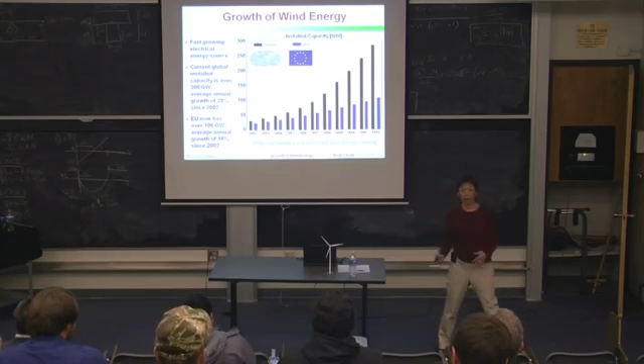Now, if we look at just the European Union, which is where I'm giving the talks, I'm trying to draw some data from Europe. It's had a slower growth, but still very healthy, about 16% annual growth in installed capacity since 2002, and they're now at above 106 gigawatts of installed capacity. So in 2002, they had about 75% of the world installed capacity. Now they have about 35%. So the growth in installed wind power has been more elsewhere in the world.

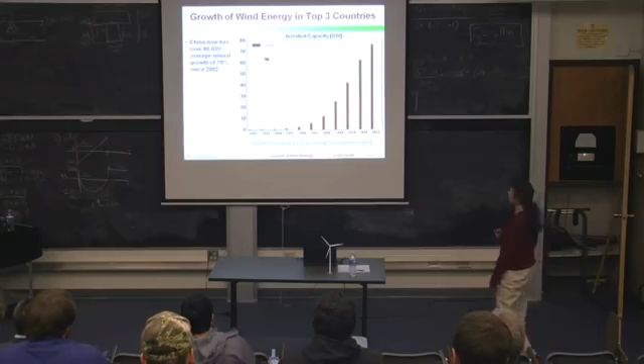Now let's take a look at the top 3 countries in installed capacity. So who knows which country has the most installed capacity? China, yes. So China in 2002 only had about half a gigawatt of installed capacity. They've had an annual growth rate of 70% on average since 2002, and now in 2013 they've exceeded 80 gigawatts of installed capacity. Now, which country do you think?

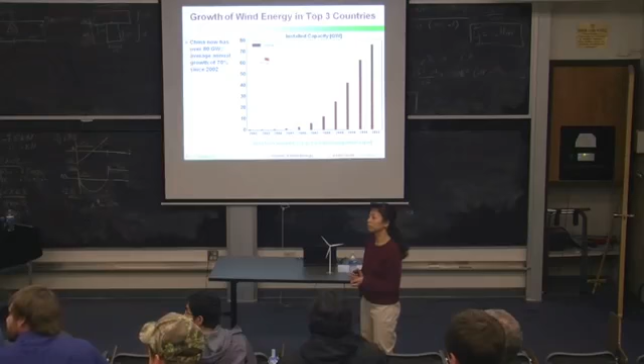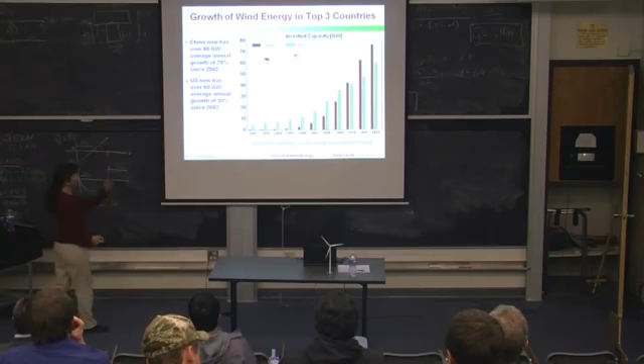Okay, so which country is second in terms of installed capacity? US, exactly. So US now has over 60 gigawatts of installed wind capacity. We've had an annual growth rate of 30% every year since 2002. So in 2002, we had maybe 10 times the installed capacity of China. We've grown at a slower rate, so China surpassed us in 2010.

Now, which country is number 3, do you think? Australia? No. Germany, yes. So Germany has grown still at a reasonably healthy rate, 10% annually since 2002 on average. They now have over 30 gigawatts of installed capacity. They had about 25 times the installed capacity of China in 2002, about 2.5 times what the US had. They've grown at a slower rate since then.

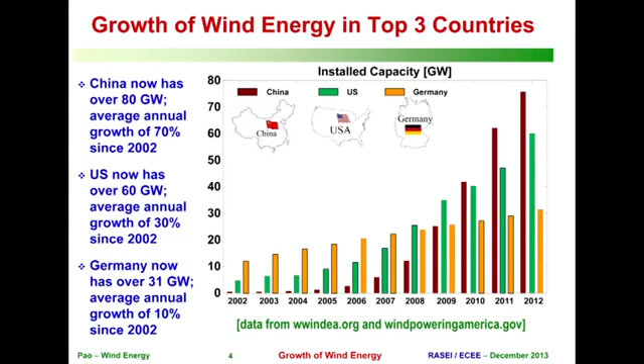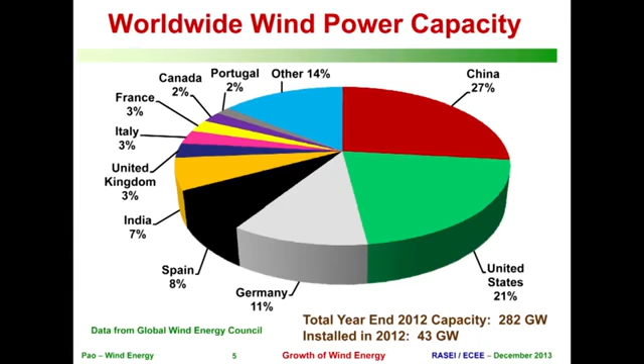So several European countries are like that. They had more installed capacity about a decade ago compared to other countries, and they've grown still at a healthy rate, but not as fast as some of these other countries. So before I get to another way to compare, I have one more slide showing more countries. After China, US, and Germany, we have Spain. India, like China, has seen rapid growth in recent years. A number of other countries in Europe; Italy, where I'll be next week, is about 7th in the world. Canada has had a number of strong years in installations recently as well.

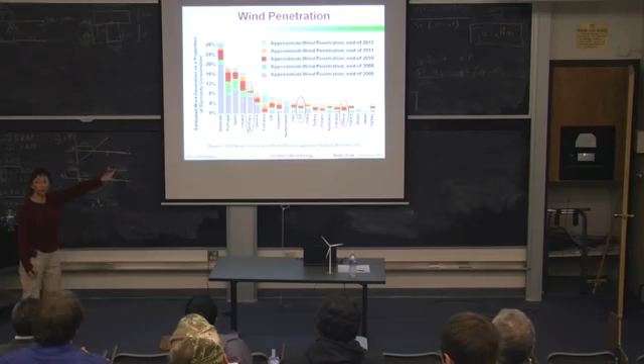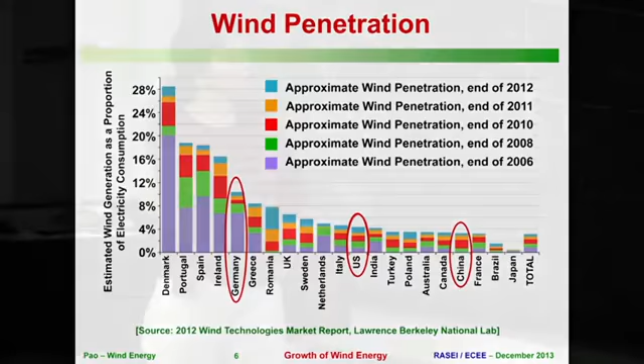So now getting to wind penetration, that's another way to compare countries. Wind penetration is the percent of each country's electrical energy needs that is being met by wind. And in this regard, Denmark is by far the number one country. About 30% now of Denmark's electrical energy needs are being met by wind. So here I circled the 3 countries that we talked about earlier. China, even though it has the most installed capacity, actually has lower wind penetration. A number of European countries have quite strong wind penetration. US is at just over 4% right now.

Okay, so the wind industry overall is relatively healthy. There has been strong growth in installations worldwide, but the wind industry is continuing to try to drive down the cost of wind energy to try to make it more and more competitive with other sources of energy.

Okay, and one way that it tries to do this is to go to larger and larger wind turbine sizes. So if we look at the wind turbine sizes over the last 3 decades, they've really grown. So wind turbines that are typically installed on commercial wind farms now are in the megawatt range. They typically are at about 90 to 100 meters at hub height, and they typically have rotor diameters of about 100 meters. That's hard to fathom.

When you see a wind farm far away, they don't look that large until you get very close up. So I've put 2 other things on here at approximately the right size. So a Boeing 747 is noticeably smaller than the current rotor area. Yeah, so that's a soccer field, since I'm going to be in Europe next week. And so these are really large machines.

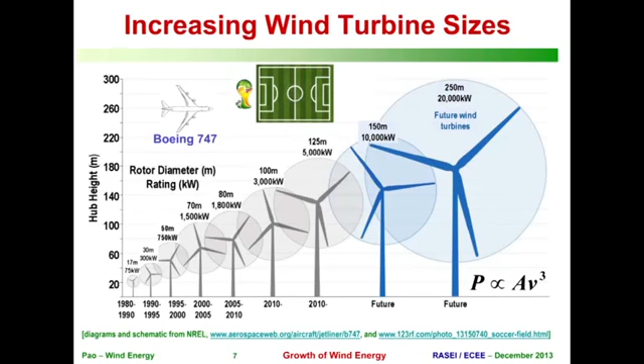So for land-based turbines, the commercial wind farms that are being installed now tend to have 1 to 5 megawatt wind turbines. These larger turbines that are under development are more for offshore wind, because for land-based turbines, in terms of the size of roads and the size of railways, they've really reached capacity in terms of the sizes of wind turbines that they can install. So these larger turbines are being developed primarily for offshore wind.

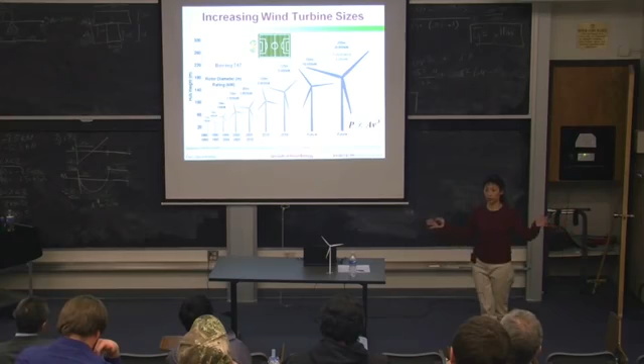Now you might say, well, why are they developing larger wind turbines if they're so hard to transport? Well, the primary reason is that the power available in the wind is proportional to the cube of wind speed, and wind speed tends to increase as you get higher off the ground, so that's one reason to go to higher and higher towers. And the power is also proportional to the rotor area, so that's another reason to go to larger turbines.

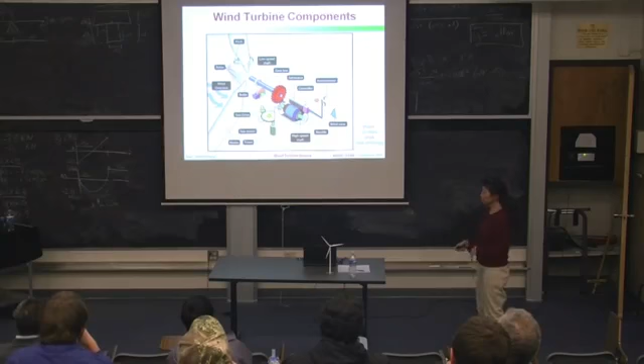All right, so let me just briefly, in a nutshell, explain wind energy. So wind comes into the rotor plane, and because of the design of the blades, that creates lift, causing the rotor to spin. That causes the low-speed shaft to spin, and that typically is stepped up through a gearbox to a high-speed shaft, which will spin the generator, generating electricity. So I have kind of a model turbine, which I'll pass around just for fun.

So the main components are the base, that's usually a lot of concrete, the tower, and then the nacelle, which sits at the top of the tower and holds the generator, and then the rotor, which includes the 3 blades and the hub at the center. And so this is maybe a 1/200th scale turbine compared to a megawatt wind turbine. I have other ones, yeah.

So, can you talk at all about these turbines without gearboxes? Yeah, so I'm not going to talk about direct drive, but Sandy Butterfield gave a very good RASEI talk, which I think was recorded, so it should be online, about direct drive. No, I'm not going to talk about that.

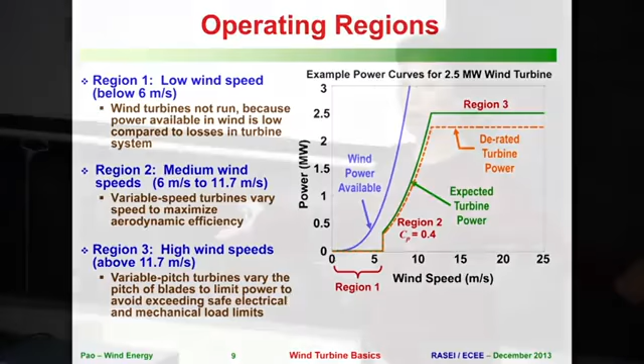Now, as wind speeds continue to increase, we will move into what's known as region 3, or above rated operation. So now once there's enough wind speed, now we're actually capturing already 2.5 megawatts of power. We're generating 2.5 megawatts of power. And we don't want to generate any more power because we'll burn out the generator. And so in region 3, what's done is to pitch the blades to let more of that wind go by. So we're shedding some of that wind so that we can maintain the power capture at the rated power of the turbine.

And we also try to pitch the blades to additionally try to mitigate structural loads on the turbine, okay, to reduce maintenance issues and extend the lifetime of the turbine, all to try to reduce the cost of wind energy. Now, so this is typically how wind turbines are operated. So in region 2, you try to maximize power capture. And in region 3, you're regulating the power at that rated power of the turbine.

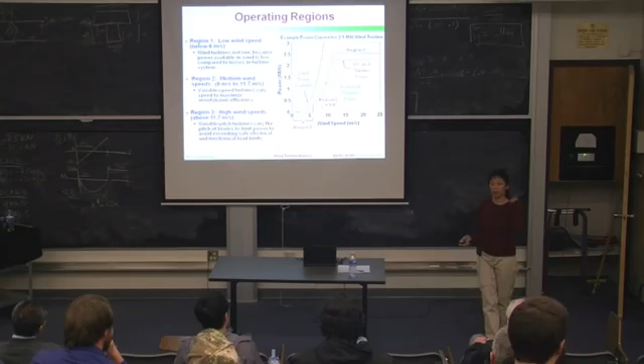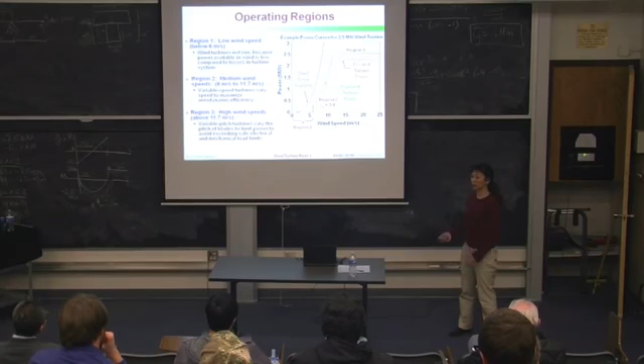So effectively, in both these operating regions, region 2 and region 3, you're operating at the maximum power that you can be. So here, you're trying to maximize power, and here, you're at the maximum power, rated power of the turbine. And so the concern with having more and more wind power on the utility grid is that wind turbines typically can't increase their power to help address electrical load issues that might occur on the grid. And so what I'll talk about later on in the talk is, can we or should we derate the power being captured by the wind turbines so that then there's headroom that allows wind turbines then to respond to utility requests for more power to try to balance the grid.

Right? So before I talk more about what's called active power control of wind turbines, let me talk about the operation of the utility grid. I'll first talk about it more generally, and then talk about some of the challenges as we increase renewables, in particular solar and wind, on the grid. And then I'll talk about some of the solutions that can try to address some of the issues.

Okay, so just a very brief history of power systems. As power systems were built up, as there are customers, typically there's power that's generated at a power plant, and it's transmitted, often over long distances, to a local power substation, which then distributes the power to the customers. Okay? Now, most traditional power plants have what are called synchronous generators.

Okay? And as power systems were built up in different geographical regions, ultimately they were connected for improving the reliability, so that if one region had greater electrical demand, the power systems from other regions could help provide that generating capability. Now, when synchronous generators are operating at nearly the same frequency and they get interconnected, they tend to synchronize with one another. They tend to swing together at essentially the same frequency. Large deviations in the frequency can destabilize the network of these connected generators. And so we typically don't want large deviations in frequency.

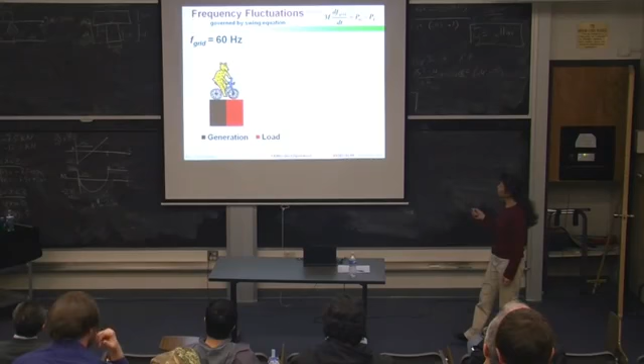So I want to thank Jacob Aho, my PhD student, for this slide. We've used it a number of times to try to explain this concept in a fun way. So the grid frequency fluctuations are governed by the swing equation. PG is the power being generated. PL is the electrical load. So we want the power generated to equal the electrical load.

Okay, so when it is equal, Mr. Conventional Bear is happily pedaling on a flat surface, and the right side here is 0, and so the frequency of the grid is constant at the desired frequency, which in the US is 60 hertz, in Europe is 50 hertz. M here is the inertia of the system, or it's proportional to the inertia of the system. So we'll talk about that in a bit. Now, if electrical load suddenly increases relative to the power generated, then this right side becomes negative and the frequency drops. Mr. Conventional Bear has a harder time going uphill here, slows down.

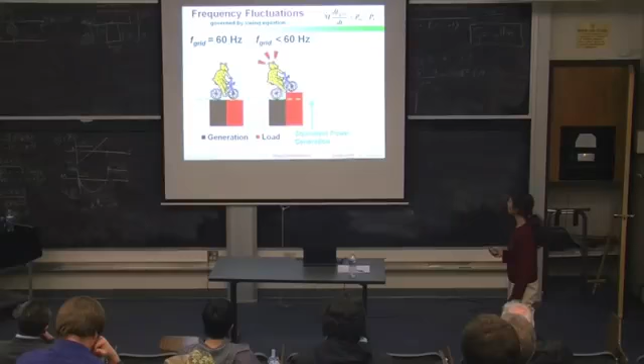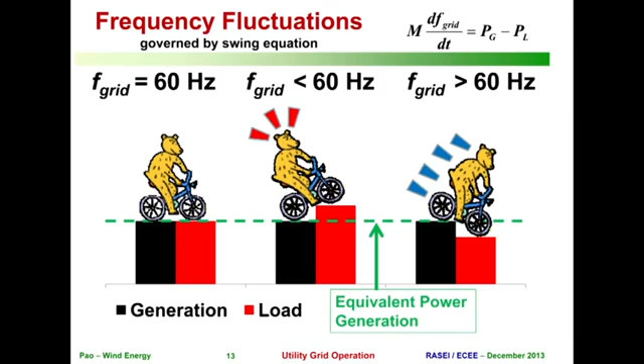Now, if the electrical load drops relative to generation, then this right side is positive and the frequency of the grid will increase above 60 hertz. Now, it's probably more common that electrical load increases, or sometimes a generating source will have a fault and drop off the grid. And so oftentimes we want to respond to events such as that.

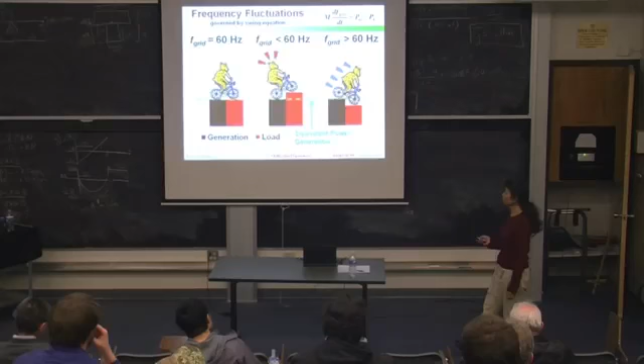So if we have a loss of generation event, PG drops and the grid frequency will suddenly drop. Now, how fast this frequency drops depends on this system inertia. The larger the system inertia, you can think of dividing this equation by m, so this comes to the right-hand side. So the larger the system inertia, the smaller the magnitude of this slope in this drop of frequency.

Now, primary frequency response is this first period where the synchronous generators, via their governors, provide an automatic response to try to arrest the frequency drop and then bring it back up to some steady state. And this all occurs in about 30 seconds.

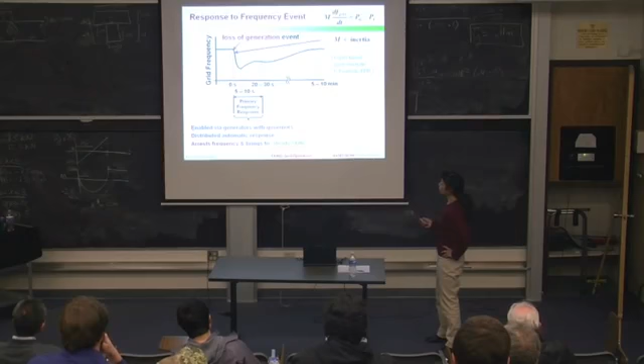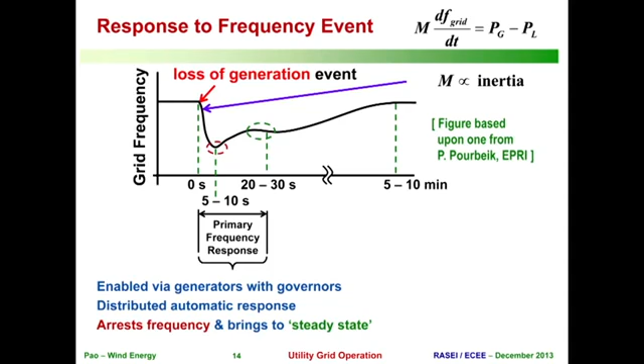Now, once we complete the primary frequency response, then it's transitioned to what's known as a secondary or tertiary frequency regulation period, where there might be automatic power commands generated through an automatic generation control, or manual power commands generated. And the goal here is to bring this frequency back up to the 60 hertz in the US or 50 hertz in Europe.

All right, so let me talk a little bit about primary frequency control and secondary regulation. So in the industry, this is typically referred to as primary frequency response, but in electrical engineering, we talk about frequency responsive systems, and so it can get pretty confusing. And so I like to refer to this as what we're really doing is primary frequency control. So that's how I'm going to refer to that for the rest of the talk. I might also call it droop control.

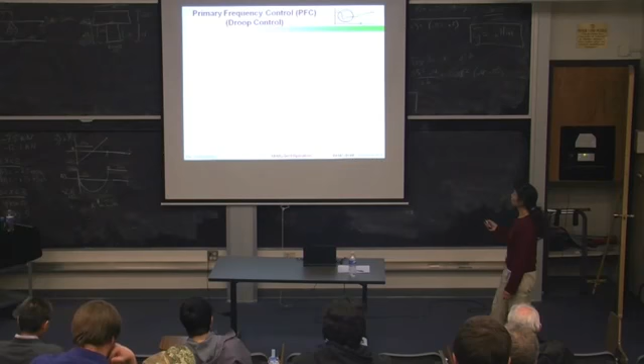So we're essentially trying to arrest the frequency drop and bring it back to some steady state here. And this is for synchronous generators provided via governors. And the governor response is characterized by what is called a droop curve. That droop curve is typically fixed for the mechanical synchronous generator machine. So what a typical droop curve looks like is as follows. This is a plot of the percent change in commanded power as a function of grid frequency.

And so if the grid frequency is close enough to 60 hertz within this deadband, then everything is happy. Nothing actually is activated in this primary frequency control. But if the frequency deviation gets large enough, we move out of the deadband. So in the US, it's common to see deadbands of plus or minus 15 millihertz or plus or minus 30 millihertz, kind of in that range.

And so if, say, we have a sudden loss in generation, grid frequency will drop, and if it drops enough, then we come to this droop region where it's going to command an increase in power from this generator to try to arrest that frequency drop. So essentially it's a proportional control in this region.

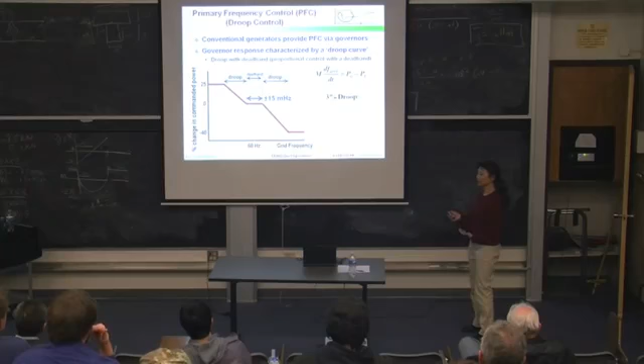So because this is being plotted as percent change in commanded power as a function of grid frequency, the smaller the percent droop, the more aggressive the droop curve. So a 3% droop means that a 3% change in grid frequency leads to a 100% change in commanded power. So if you have a 1% droop, then a 1% change in grid frequency will lead to a 100% change in commanded power. So it's more aggressive.

All right. Now, secondary control is a little more complicated to explain. There are many different ways and different details in different utility systems, so I'm not going to go in as much detail here. But the goal here is that after the primary frequency response, we want to bring the grid frequency back up to 60 hertz, say, in the US.

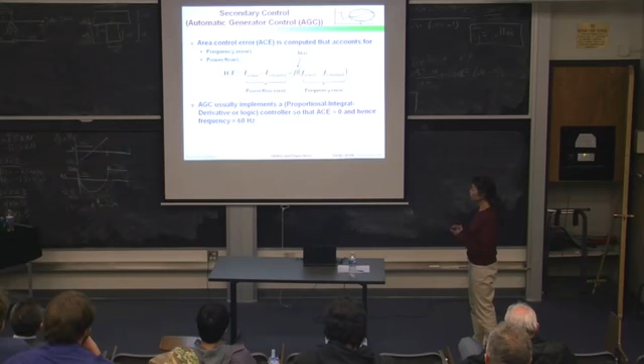And what's typically done is, based on measurements, an area control error is computed, and it's a function of frequency errors as well as power flows. And so this ACE signal is a function of this frequency error. Beta is a gain that's often referred to as a frequency bias. And this is the actual interchange power flow, and this is the scheduled interchange power flow. And so if there's an error there, that's accounted for in this area control error.

And so the automatic generator control generally implements a pretty simple control algorithm, often a proportional integral derivative controller or a logic controller, to drive this ACE signal, the area control error signal, to 0. And so that will essentially drive the frequency to the desired frequency of 60 hertz.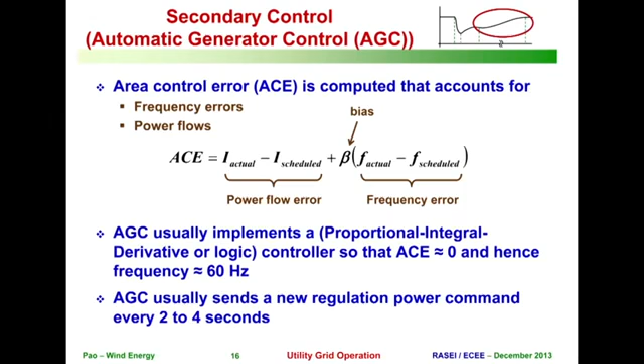Usually, the automatic generator control sends a new regulation power command every 2 to 4 seconds. So to recap, we want electrical generation to be equal to electrical load. Traditionally, electrical generation is controlled to follow the varying load. The utility typically doesn't know when you're going to use your appliances or lighting, or when a factory is going into full production. It's just trying to adjust generation to meet varying demand.

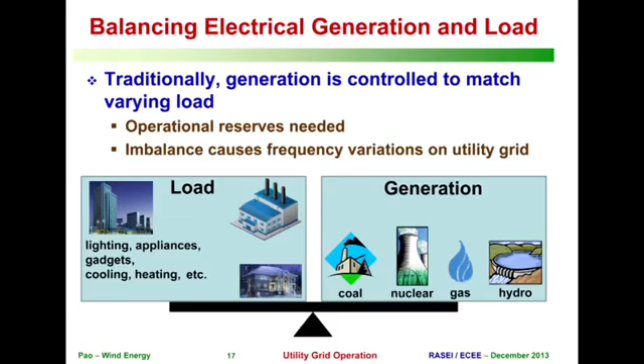In order to do that, it has to have some operational reserves. It can't always be operating at maximum output. And if there's an imbalance between electrical generation and load, that will lead to frequency variations on the utility grid. If there are large imbalances, that leads to large frequency fluctuations, which can cause unwanted under-frequency load shedding, or even blackouts.

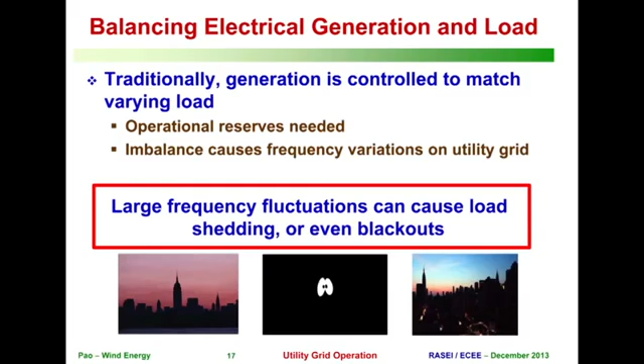A utility might have some amount of nuclear, which they operate, and some amount of coal. Ideally, they'd like nuclear and coal to operate at a fixed rate of energy production. There might be some hydro, and oftentimes gas is the most flexible, so that's the one that gets cycled up and down to meet increases and decreases in demand.

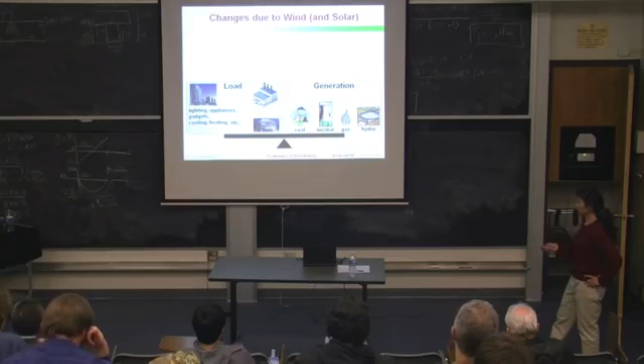Now, what happens when we have increasing amounts of wind and solar in the generation mix? Wind and solar are intermittent generating sources. Wind energy is only available when the wind blows, and solar energy is only available when the sun shines. People are worried that as more wind and solar are integrated onto the utility grid, these intermittent sources are hard to predict and hard to control. It's going to be harder and harder to control this generation mix to meet variable load.

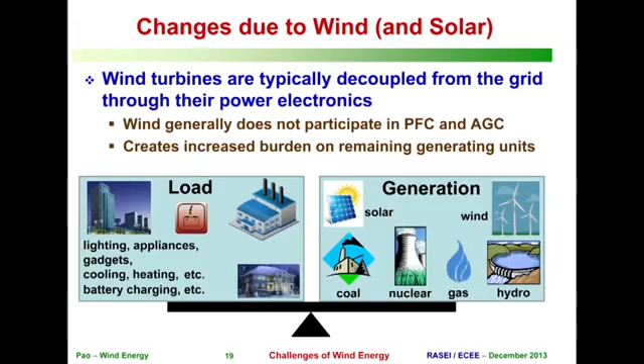Wind turbines, and similarly solar, are typically decoupled from the utility grid through their power electronics, so they're usually not asked to provide primary frequency control or secondary automatic generator control. As more wind and solar are added to the generation mix, the remaining traditional sources are asked to do more and more of the balancing work. So the remaining sources become a smaller percentage of the generation mix, yet they're still asked to do all that balancing.

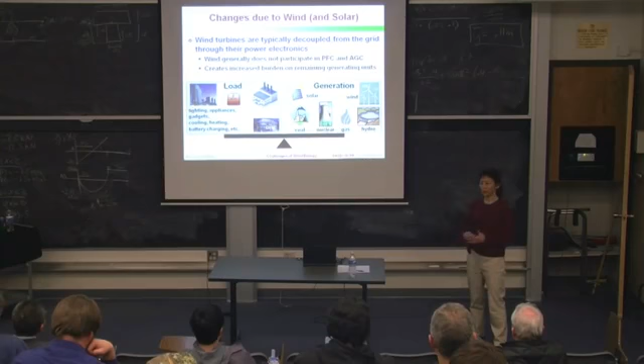There's worry that it's just going to be too hard to balance generation with load. In particular, if we look at more electric vehicles on the grid and peak demands that might come about—say 1 million electric vehicles—at the end of the day, after people have commuted to work and back, they all plug in their electric vehicles. There might be a sharp increase in load that's difficult to meet, raising concerns over the reliability of the utility grid from many different viewpoints.

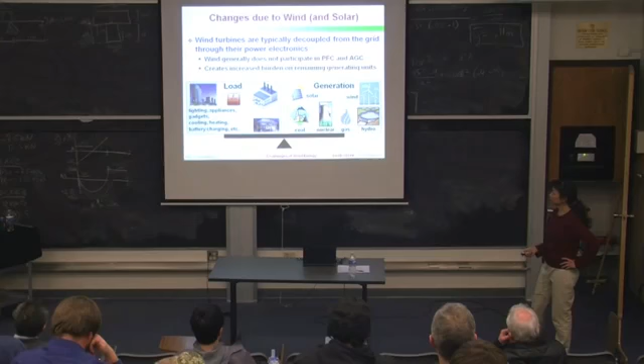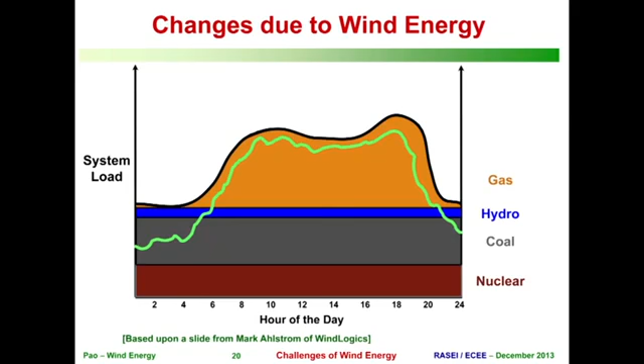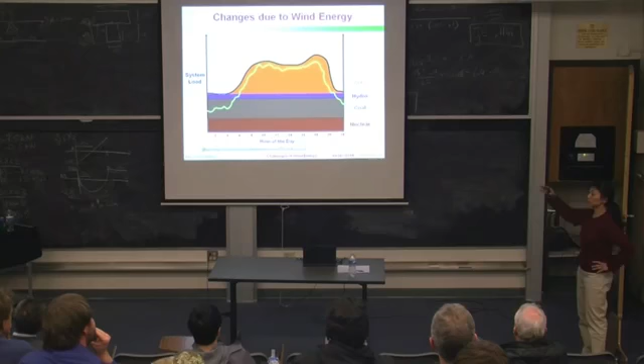Wind typically blows harder at night in most regions around the world, so there's a bigger decrease at night and maybe a bigger decrease in the evening, and less so during the daytime. Because of this decrease, we're now asking hydro to cycle, and also coal to cycle, and if we increase wind penetration further, we might ultimately need nuclear to cycle. This is some of the concern—it's difficult for coal to cycle rapidly to respond to changes in system load.

All right, so what are some methods that we can try to address these issues?

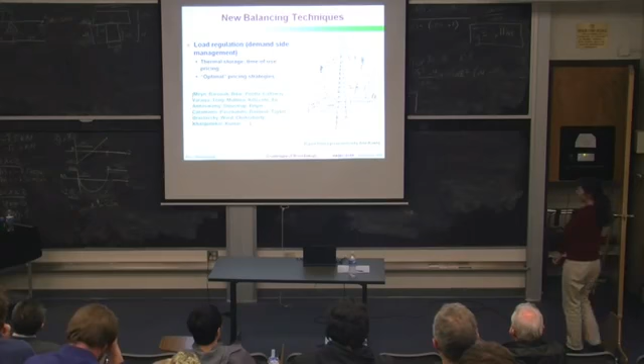One method is to try to do load regulation, or what's also called demand response or demand side management. Essentially, you predict what might happen during the day. If it's predicted to be a really hot day in the summertime, while it's still early in the morning and demand is low, you might start to cool down buildings more than you would at that time of day, using the thermal inertia of the building. Most people can't feel the difference of a few degrees, so air conditioning might not be required during the peak part of the day, which helps reduce peak demand and improve grid reliability. A number of people in our field have looked at demand side management, time of use pricing, and optimal pricing strategies so that users do the right thing and avoid increasing electrical load at extreme peak times.

Another way to address the issues of increasing renewables in the grid is to develop effective energy storage techniques. Unfortunately, at the current time, the most effective electrical energy storage methods are really expensive, so it's not being embraced as the solution just yet. People in our field have looked at better modeling and control of storage options, and also at where to place storage at different locations on the utility grid to maximize effectiveness.

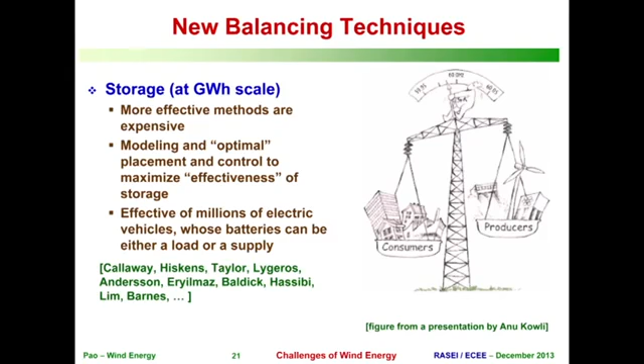They've also looked at the case of having a million electric vehicles. While they can be viewed as a load, they all have batteries, so they can also be viewed as a supply. If we had smart meters and distributed controllers on these electric vehicles as they get plugged in at the end of the day, as long as the user doesn't care about their vehicle being charged until the next morning, we could let the utility decide how to charge that vehicle, possibly drawing energy from the vehicle when the user doesn't necessarily need that energy.

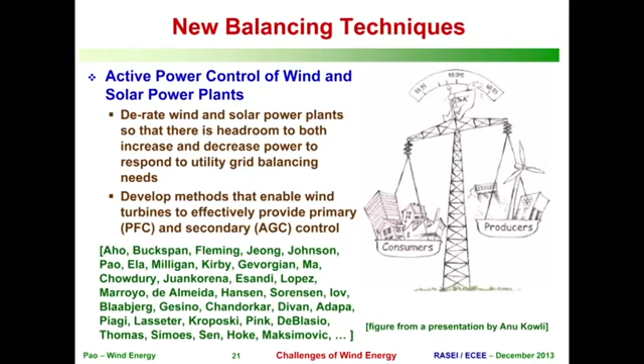Finally, I'd like to spend the next bit talking about active power control of wind power plants in particular, though you could do the same for solar. The idea, as I alluded to earlier, is that instead of operating wind turbines and solar at their maximum power capabilities, we derate them, say to 90% or some level, so we leave ourselves headroom to increase or decrease power in response to utility grid requests to help balance needs. More work has been done developing active power control methods for wind turbines. It's a relatively newer area of research in the solar community, but Professor Maksimovic and Andy Hoke are actively looking at active power control of solar as well.

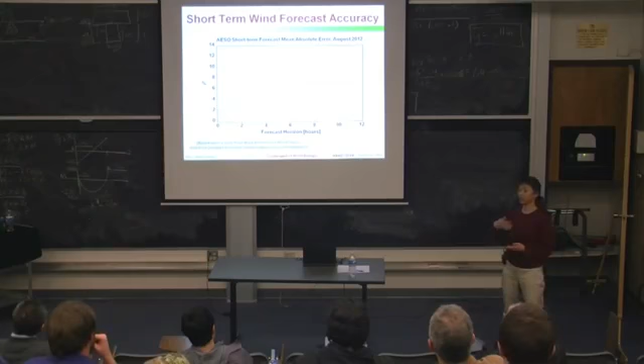Before I talk more about active power control of wind, I want to note that wind forecasting has been improving. This is largely being done by the atmospheric science community, which has been developing better methods of wind forecasting. As utility grids change the way they operate to be more flexible in planning, say five minutes ahead in shorter time increments, this along with better forecasting will mean very accurate forecasts and better reliability in terms of scheduling wind that will actually be available and provided.

Let me now talk a little more about active power control of wind turbines. Can we actively control the power of wind turbines, not always at the maximal level but at some lower level, and then control that power to follow a desired power reference so we can help stabilize the grid and make it more reliable? Wind turbines, as I mentioned, are traditionally decoupled from the utility grid, so they're typically not asked to provide primary frequency control or secondary regulation.

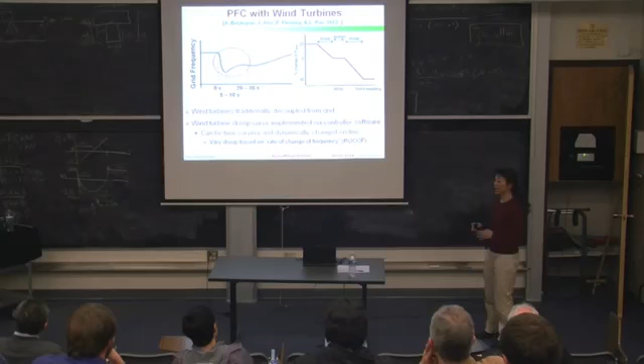But for wind turbines, we can implement a droop curve synthetically via software and ask a wind turbine essentially to respond to frequency deviations.

For wind turbines, we have more flexibility. Synchronous generators typically have a fixed droop curve tied to their physical characteristics, but for wind turbines we can design different types of droop curves. In fact, we found that dynamic droop curves, time-varying curves that change their characteristics over time, particularly as a function of the rate of change of frequency on the grid, tend to be very effective.

As an example, if the rate of change of frequency in the grid is zero or very little, we might use a very non-aggressive droop curve. Here we have two static droop curves. Static droop curve 1, the red curve, is less aggressive, with a 5% droop and a 50 millihertz deadband. Then we have a more aggressive droop curve, static droop curve 2, with a 2.5% droop.

For our dynamic droop curve, we interpolate between the two based on the rate of change of frequency. If the rate of change of frequency is zero, we use the less aggressive droop curve. If it starts to increase in magnitude, becoming more negative as frequency drops, we interpolate between the two static droop curves to generate our dynamic droop curve response, moving more toward the aggressive curve depending on the rate of change of frequency.

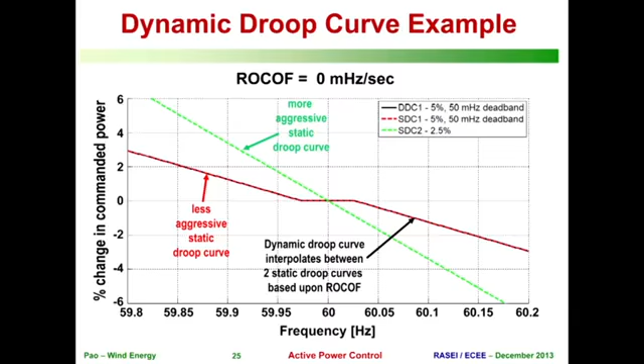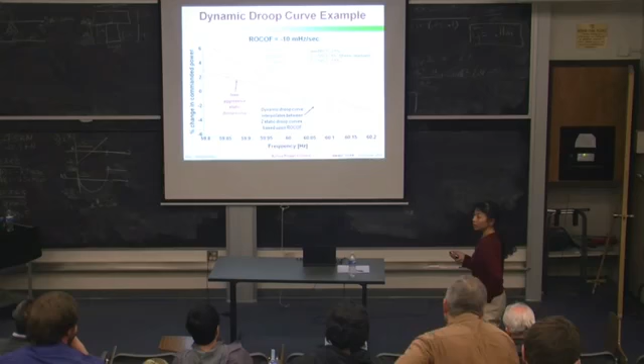So what are you controlling to change the droop curve—the pitch, the blades? The droop curve takes the frequency input. Depending on whether the frequency drops, we get a commanded power. That commanded power is sent to our control system for the wind turbine, and we change both pitch and generator torque to try to follow that power reference.

If the power reference isn't changing too rapidly, we can typically follow it with pitch alone. If the power reference changes more rapidly, generator torque has a faster response, so we'll use that to follow the power reference.

So you went to a 50 millihertz deadband—do you have that degree of freedom? Yes, we do have that degree of freedom in terms of what we're asking of our wind turbine. But doesn't the grid constrain you? No, the grid doesn't constrain us. Usually for synchronous generators, there's just some fixed droop tied to the physical characteristics of that generator. For wind turbines, they're typically decoupled from the utility grid due to their power electronics, but we can ask them to provide a primary frequency response through a synthetic droop curve, essentially.

Any other questions? Some time ago we had this fellow from England give a discussion on this—is that what they are trying to develop in England? Yeah, I was there. He came last fall, about a year ago. Yes, he's from Sheffield. I've forgotten the details of what he was talking about. Controlling them to look like a synchronous generator, basically? Yeah, he was using inverters to kind of emulate the grid. Yeah, right, so there's a lot of similarities to this.

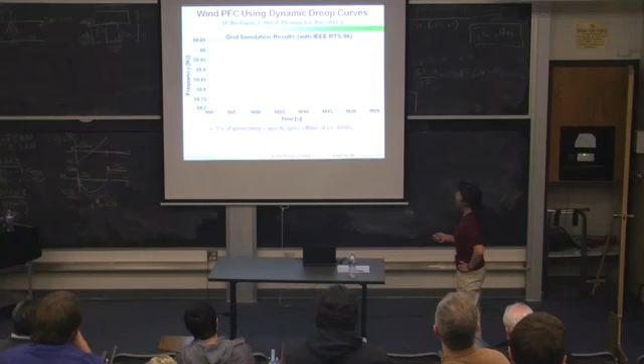So we've run grid simulation results to see how well wind turbines can respond to grid events using a dynamic droop curve. Here we use an IEEE standard grid model, and in the simulation, 5% of the generating capacity suddenly goes offline at time equal to 1,000.

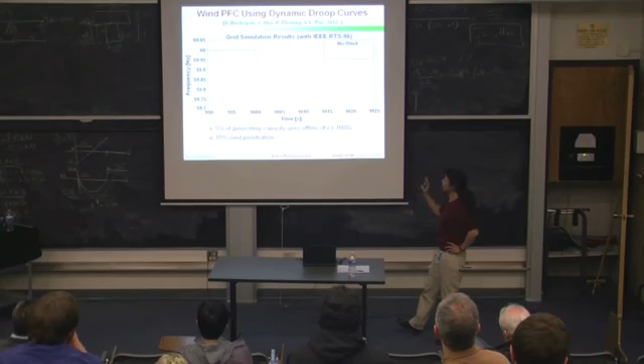When there's no wind in the mix, this is the response, with just all conventional generating sources. Now if 15% of the utility generating sources is wind, but wind, as it traditionally has been, does not participate in primary frequency control, we actually get a worse response. The frequency drops to a lower nadir and comes back to a steady state further from 60 hertz. This makes sense because only 85% of the generating resources are trying to respond to this grid event—wind isn't helping there.

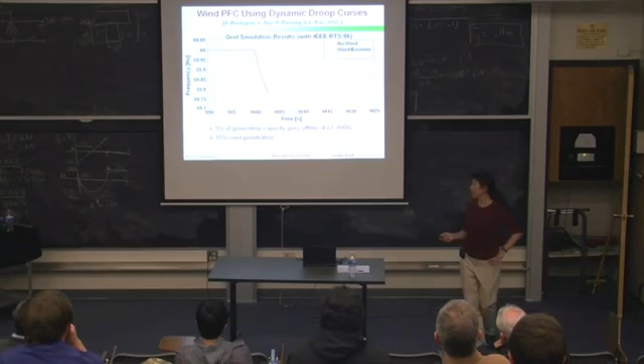Now, if we let wind participate with the dynamic droop curve, we can actually do better than when there was no wind on the grid. We're arresting the frequency earlier and bringing it back to a steady state closer to 60 hertz, and this leads to the secondary control having an easier time.

Frank asked: to what extent, in the normal system, is the droop associated with the total size of the power system?

Since the generators should couple together, you've got all this timing. So am I correct that the droop curve that you typically see is a function of the whole system size and response? Or is it only specific to an individual generator?

Certainly, it is tied to the particular generator, but they will all... well, you can look at the whole grid, it has its own droop curve. That droop curve is flat, horizontal, and cannot change. Then each generator has its own droop curve that plays against it. That is in fact used for a historical reason, and that leads to what's called the house diagram. If you have power people in the audience, they may use that terminology.

That's only if you're assuming that your generator is significantly smaller than the grid and can't actually affect this frequency. That's right. So we're assuming that we have grid frequency data that we can use to generate a power reference curve to provide to our wind power plant or our wind turbines. And then we're trying to design the controller for the wind turbine to follow that power reference.

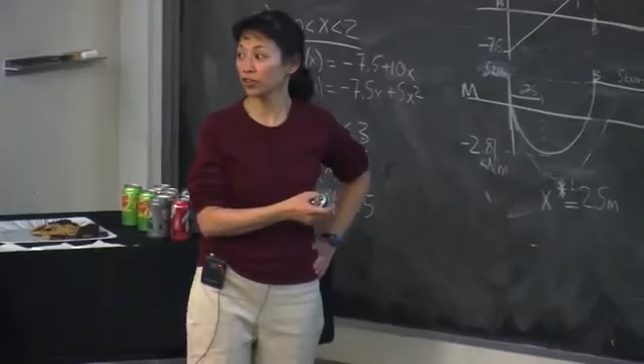So it depends on the particular grid and the utility, the generating mix on it, in terms of how low is too bad. But typically there's some threshold below which you'll have load shedding, and that might lead to blackouts. So there's almost a catastrophic change - yeah, there's definitely some threshold at which point there is a catastrophic change.

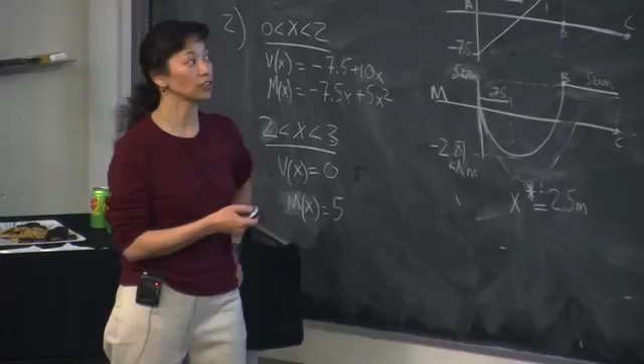And so you want to arrest this as much as possible. This is significant enough with respect to... right, and this is only 15% wind penetration. What we found in more simulations is higher penetration of wind participating will actually lead to even better response.

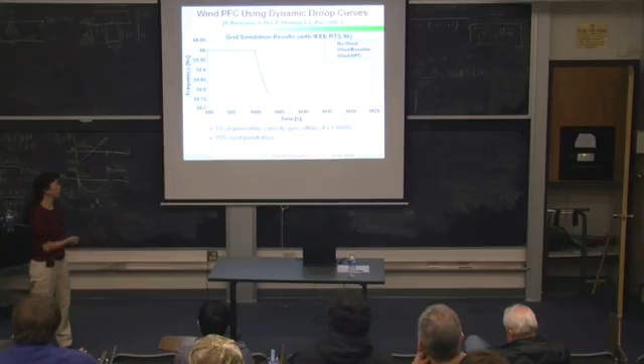So when we did these grid simulations, we were very excited. But one thing we had worried about is we're asking our wind turbines to respond to these power reference requests, and possibly asking them to pitch more and do more. We were worried that would lead to larger structural loads, and we thought that might end up being the cost of providing the service. But it turns out that in general, the structural loads are actually decreased.

Because in general, most of the time you're going to be operating at a derated operation, so you're going to have lower loads than usual. Only occasionally, when these events occur, are you asking for more. At maximum load, you have the optimal angle of attack where you get maximum lift, and that also means maximum force on the structure - you back off from that. So we have lower loads in general in that derated operation, and only when we're responding to events are there occasionally slightly more loads.

I have a similar question - do these droops actually happen often enough that it's justifiable, like you were saying, to derate your wind turbine full time so that you can compensate for these droops?

So that's another good question. You could try to predict when there might be a peak demand, and so you might run closer to maximum power most of the time. But if you predict that you might need that headroom, then you derate - so you're only derated for some shorter amount of time before events.

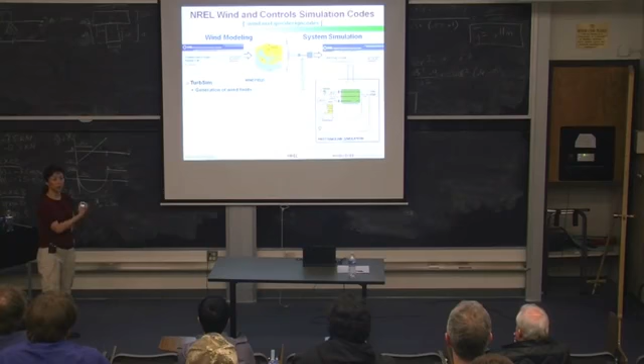All right, so moving forward. I just showed some grid simulation results. We have done detailed wind turbine response results as well to assess the typical structural loads incurred when providing derating, primary frequency response and secondary response. We use NREL's codes, which are freely available, to evaluate wind turbine response. They have a TurbSim code that generates realistic wind fields, which we pass through the turbine in another code known as FAST, for fatigue, aerodynamic structures, and turbulence, that simulates the turbine response with medium fidelity.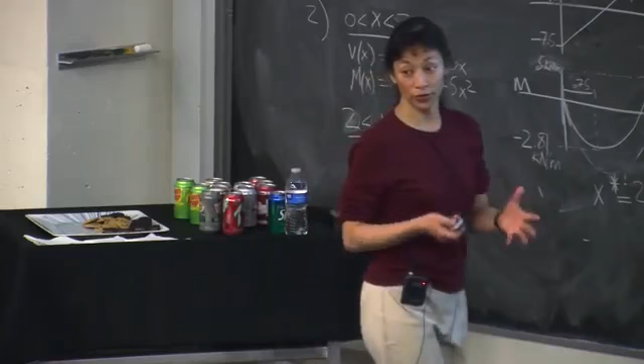There's a nice interface through MATLAB Simulink to enable us to test out different controllers relatively easily. We haven't used this newer code, which is a simulator for offshore wind farm applications. It's a much higher fidelity, much more computationally intensive code, but it actually simulates the wakes and the interactions among turbines on a wind farm. Ultimately, we would like to test that out at the wind farm level.

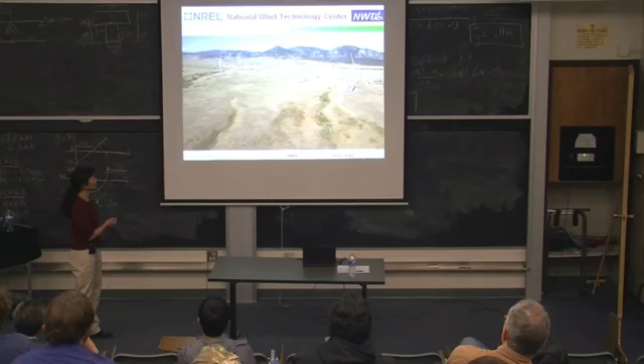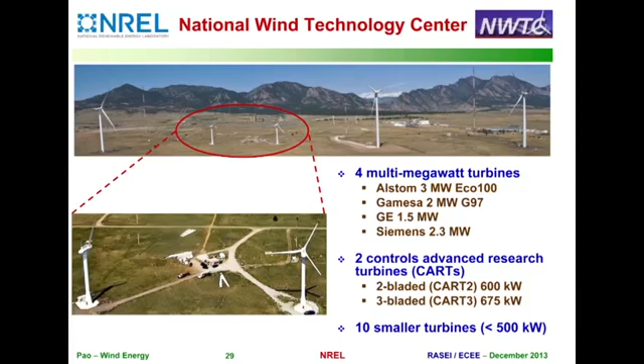Besides the primary frequency control work, we have done some secondary regulation work, and we have had the opportunity to implement our active power control algorithm on the three-bladed 675 kilowatt research turbine at NREL. NREL's Wind Technology Center is just south of town. There are 4 multi-megawatt wind turbines, and there are 2 CARTs, Controls Advanced Research Turbines. Last wind season we tested our active power controller on this turbine. This season, we're testing it on this turbine because there's additional instrumentation that will allow us to measure winds upstream approaching the wind turbine.

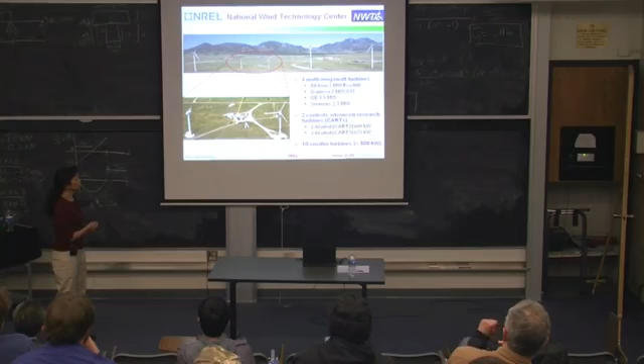So to show some of our results, maybe before I get to that, we've changed the way that wind turbines are controlled. They're not always trying to maximize power, so we've completely changed the controller for them. We have done a stability analysis of some portions of our new controller. And we have also looked at secondary control. We've combined primary frequency control with secondary control methods, and we did field tests last season on the CART 3, so these are actual experimental results.

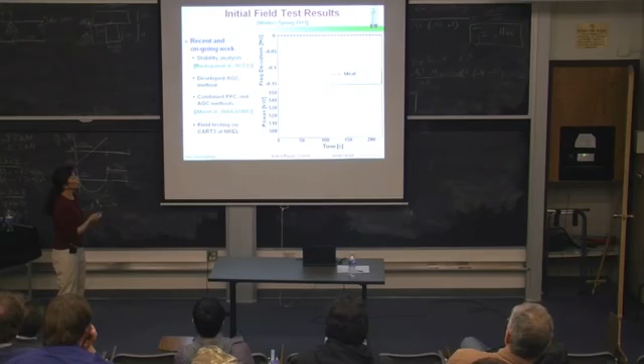Ideally, the grid frequency deviation is 0. We actually take frequency data from ERCOT, the Texas grid, and use it as input to our controller, so this grid frequency generates a power command. For the CART 3, this is the rated power, and at some point, say we can predict an event about to occur, so we derate down to 90% of rated power, and when the grid event hits, it asks for more power to balance it. The generated power follows the commanded power quite well. This coming season, we're testing on the other turbine using additional instrumentation and some modifications to the control algorithm.

So in terms of ongoing and future challenges, what we've been looking at so far is active power control of a single wind turbine: how can we control a single wind turbine through the pitch control and the generator torque control to follow essentially arbitrary power reference commands. Ultimately, we'd like to expand this out to the wind farm level, to the wind power plant level.

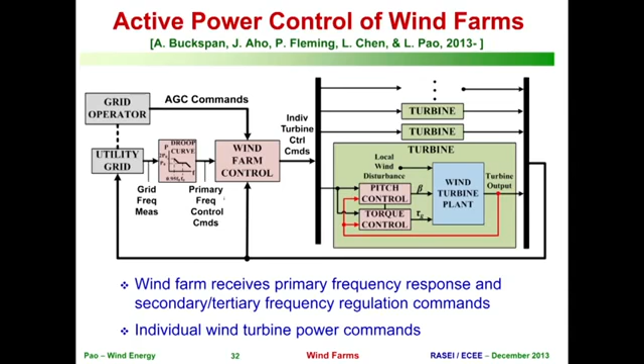So if a wind farm receives primary frequency control commands and secondary power commands from the grid operator, then how do we take that overall wind farm power command and divide it into all the individual wind turbines on the wind farm? It's probably not going to be just the total power command divided by the number of turbines, because the wind turbines actually do interact through their wakes.

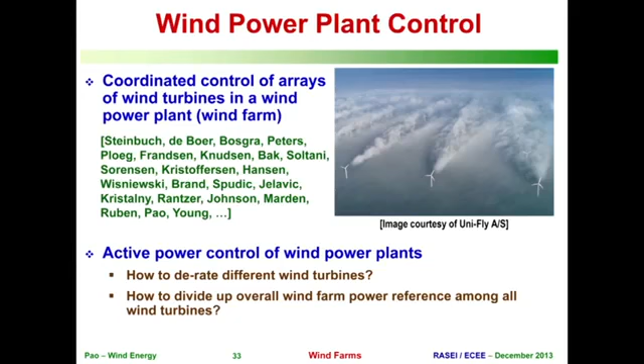So if the lead turbines take out a lot of power, then they generate a wake, and that leads to more turbulence, more structural loads on the rear turbines, and there's also less wind power available for the rear turbines to capture. And so we need to better understand how wind turbines interact with one another to appropriately divide out that power reference command to the individual turbines on the wind power plant.

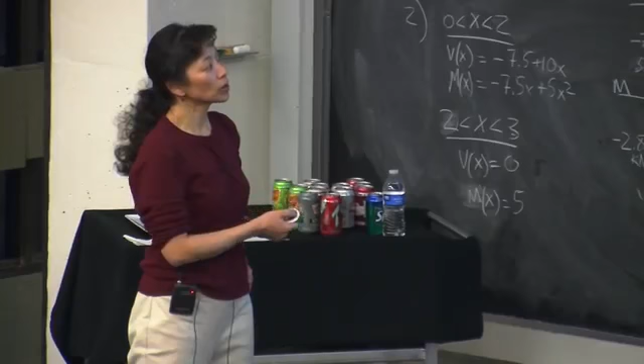So there has been work by systems and controls researchers looking at coordinated control of arrays of wind turbines on a wind farm to try to maximize power capture, which has been more of the work, but also to some extent to try to minimize structural loads on wind turbines. This is a very complex problem, and a lot of these initial algorithms use very simplified models of the wake interaction among the turbines. So going forward, we need to understand that better and incorporate that knowledge to improve the distributed or coordinated control of wind farms.

As we get to expanding to active power control of wind farms and wind power plants, taking into account the wake interactions, there are questions of how do we derate the different wind turbines? We might not want to derate them all to the same level. So how do we decide that? And how do we divide up that power reference command coming in to the different turbines?

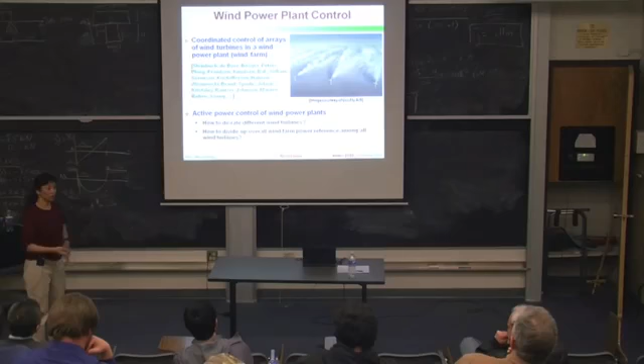So in summary, higher penetrations of wind energy on the utility grid motivate active power control of wind turbines to actively control the power output to meet grid requirements. And we found that wind turbines can enable a faster response to frequency events on the grid, that dynamic droop curves are possible for wind turbines, and that allows wind turbines to provide this faster response without necessarily increasing structural loads.

And we found through numerous simulations that higher penetration of wind, higher levels of primary frequency control participation of the wind power plants, and more derating all tend to improve the grid reliability and the grid response. So we are continuing to carefully evaluate any cost of providing this service by looking at structural loads through both simulation and our experimental implementation on the research turbines at NREL.

And as already mentioned, right now, at least for primary frequency control, the proper market incentives are not in place, and that should be established. That is, I think, an area that many systems and controls researchers would probably be interested in investigating.

So other areas of future work: so far what we've looked at is active power control of wind turbines and what we can achieve by doing that without looking at demand side management or storage. So obviously we can combine active power control of wind power plants with storage capabilities and look at what could be achieved using both, and possibly the combination of all three, active power control, storage, and demand side management, and look at the reliability of the grid that could be achieved from that point of view.

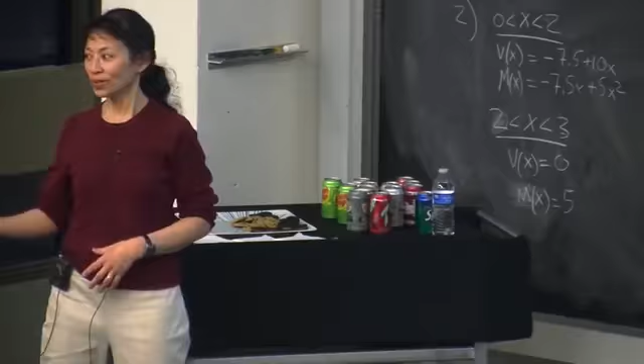And of course, there's active power control of solar power plants. That's actually a newer area of research, less has been done there, and I think a lot could be done as well. We can look at the combination of active power control of solar power plants with wind power plants, with demand-side management and storage, and look at the increased reliability of the grid that could be achieved that way.